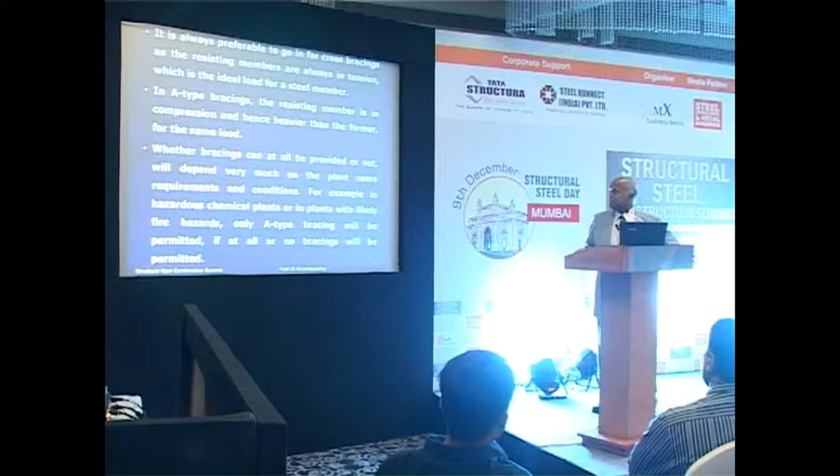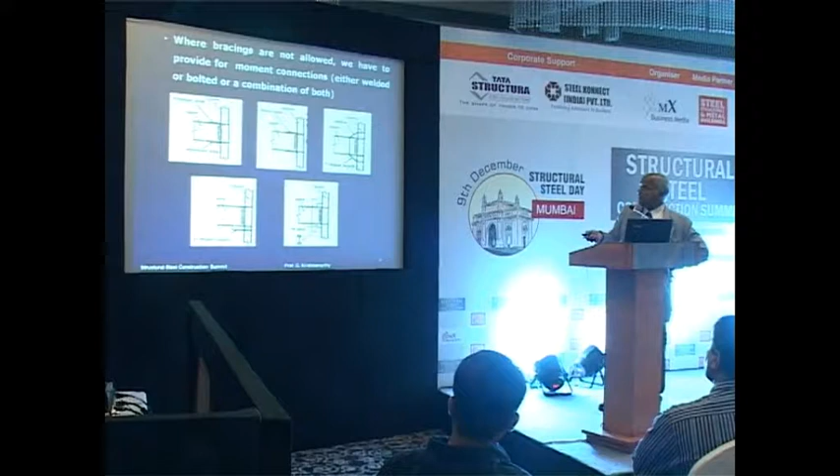So, as I told already earlier, you have to decide whether bracing is allowed or not, and if it's not allowed, then you have to go in for moment connections. So I have shown some typical moment connections here. Like see, here this is for taking the shear, while these connections are for resisting the moment. This is, I would say, a fully welded moment connection. This is also fully welded. All these are fully welded.

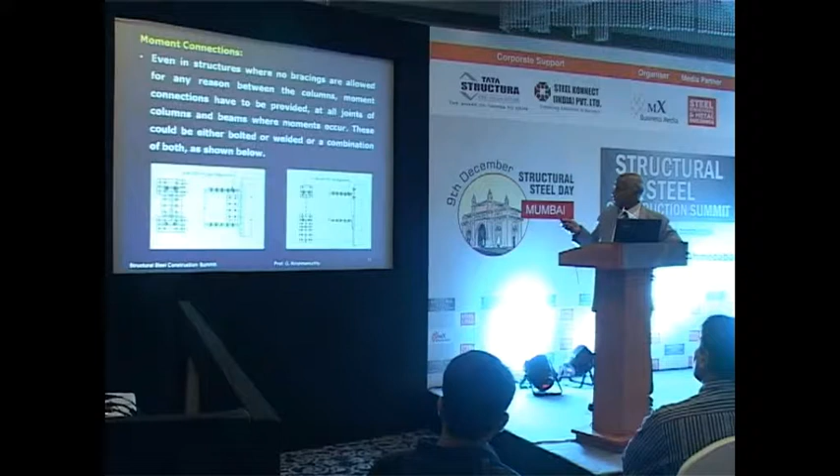Oh, I'm sorry. Oh, I don't know what's happened. Can I not go back? No.

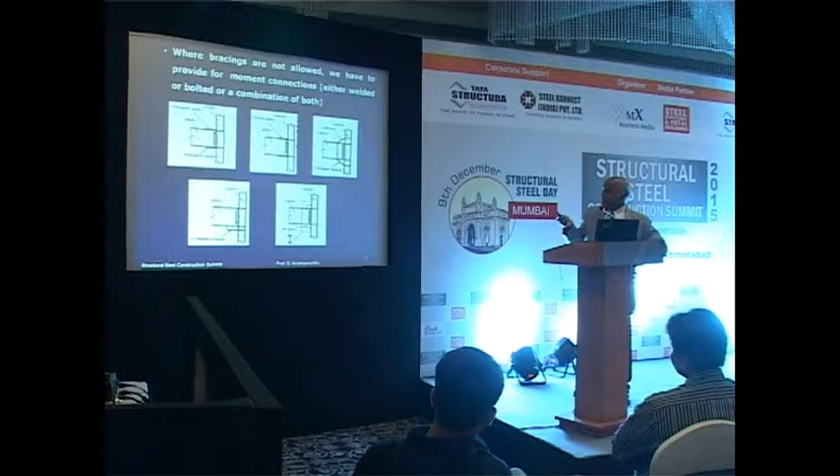Moment connections can be of so many types. I have shown just some of them; for example, in some cases you make it still stronger by putting this. It is optional, sometimes it is necessary, etc. But these are various types, so to say.

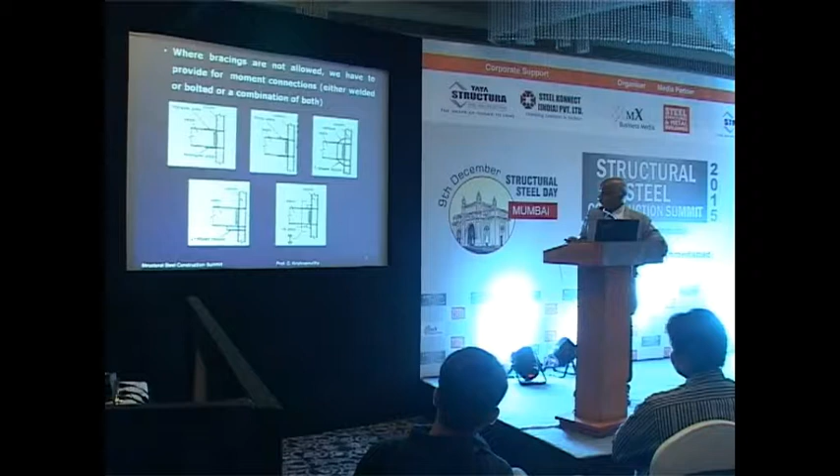Now, going back to a frame structure, basically we talk about beams and columns. So when you talk about moment connections, the beam is designed, the column is also designed. Because not only the connections at the joints, but also the columns as such have to resist moment. So I just mention a few words about what sort of sections we should use for columns.

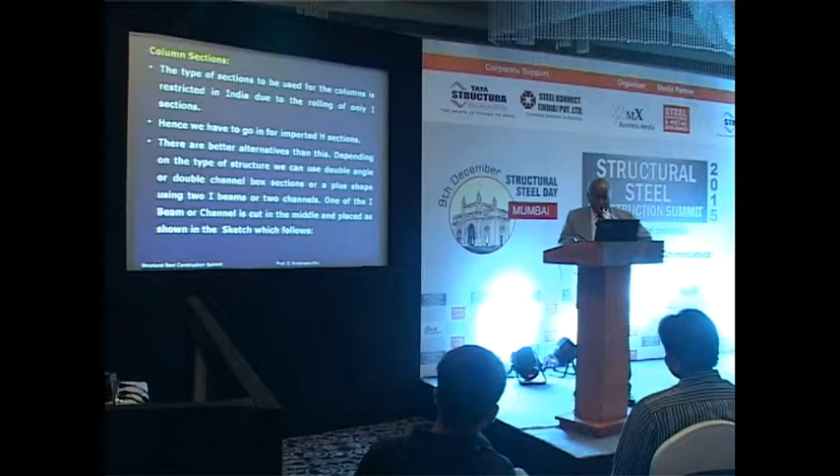Now, basically, to the best of my knowledge, in India we have IS tables for all types of sections, but what is being rolled by the rolling mills is only I sections, which is very uneconomical for columns. And we have to go in for H sections. I heard that some company is making H sections, but not the full requirement of the country, so we have to import those sections. Instead of that, there are various alternatives using the sections which are available in India. I will show you that.

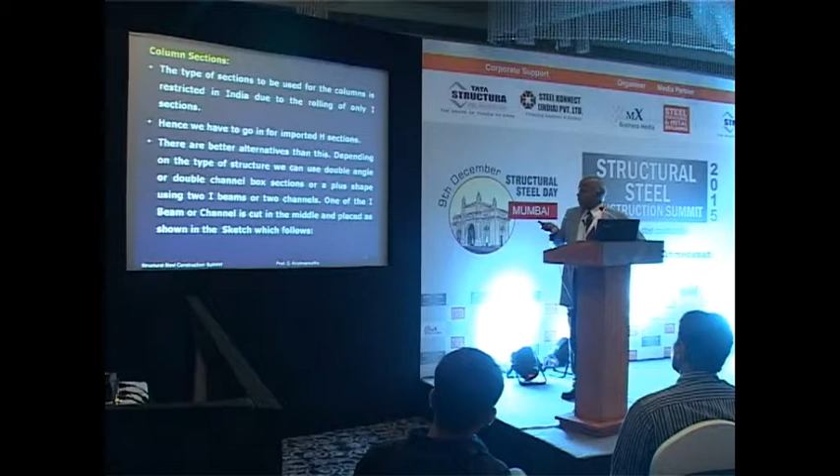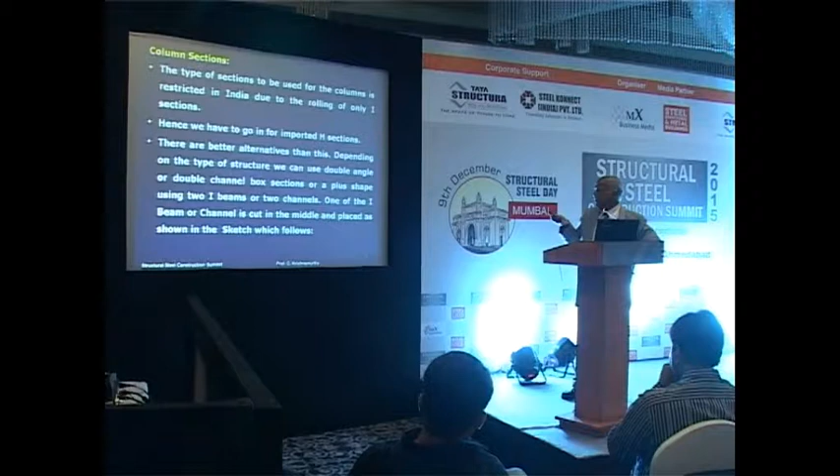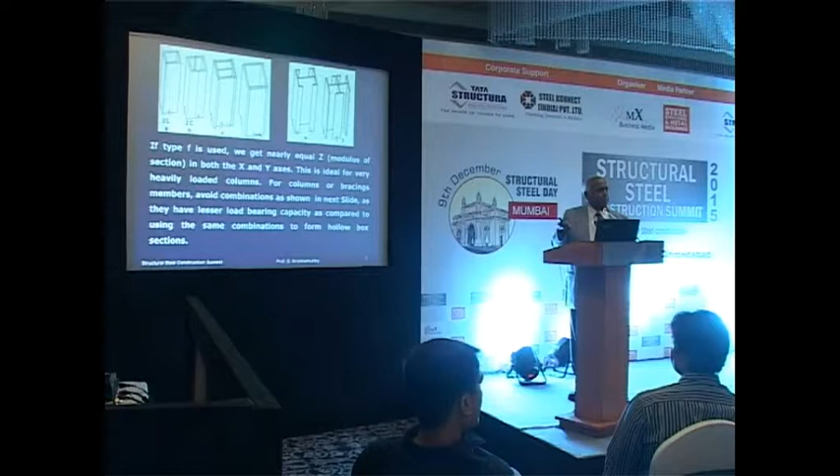I remember when I first used this, many of my colleagues were telling, how can you do this, it's not possible, this will bend, distort, etc. But nothing like that happened. Maybe I was the first person in the office at that time and I had no reference material also, but still I took the guts to use it, and it succeeded. In a project it was very useful because the steelwork weight was quite less for the capacity.

You see, it was a very highly loaded structure. Because as I said, in such plus sections, especially when we use two sections of the same property like ISMB 400 or ISMB 300, whatever is required, you get virtually the same moments of inertia about the X and Y axes. There is a slight difference because you are cutting it fully.

So these are the things which I would recommend. But there are other things which we have been used to using in structural steel, especially in earlier days when we were only using riveted and bolted structures. With the advent of welding, those types of sections, irrespective of whether you use them for earthquake or anything, I would recommend that we should not use. I will just show them.

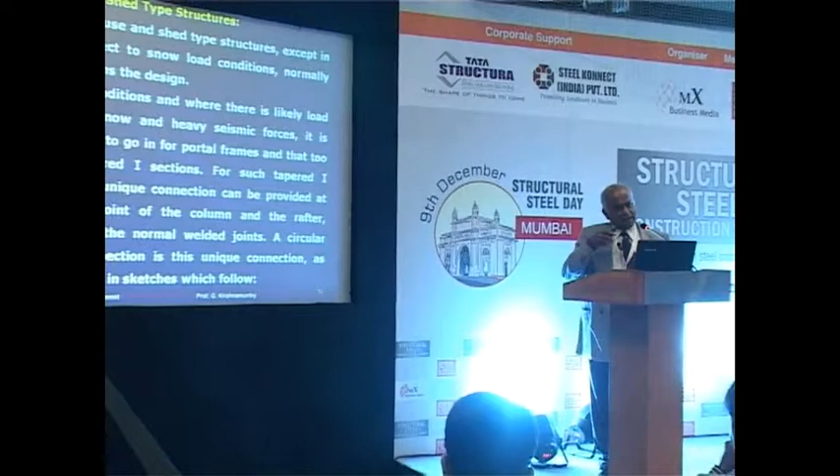Now then I go in for these type of structures, what type of structures we should use, and what about the moment connection there. We had to go in for a uniform section for the column and for the rafter, because we couldn't do a design with a varying section. Nowadays it is possible, and I remember some years back I was working for a company abroad which was using prefabricated structures. We had totally tapered sections for the column and multi-tapered, varying sections in the rafter also.

That's why, as I say, it is always economical and a better looking structure to use portal frames than trusses. And for such tapered I sections, a unique connection can be provided at the knee joint of the column and the rafter, which I will show next. Normally you go in for very bulky connections at portal frame knee joints. But I have seen and used, in a prefabricated company, a bolted connection at the knee.

After all, what is moment? As one of my seniors used to say in my earlier days, ultimately it's a couple. So the same moment can be converted into shear forces which will be shared by all the bolts, and that was a very convenient connection for site erection also. No welding was involved, and the rafter and the column used to be just assembled with a slight difference of half a web thickness, because it was off the center, and we used to do the work very fast at site.

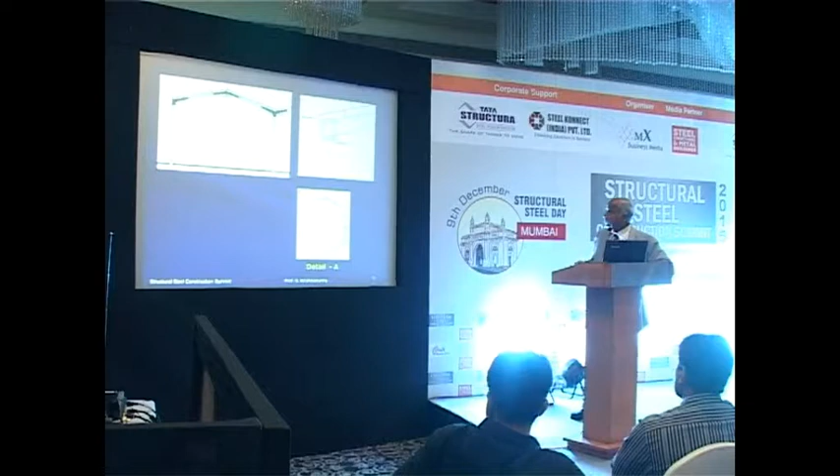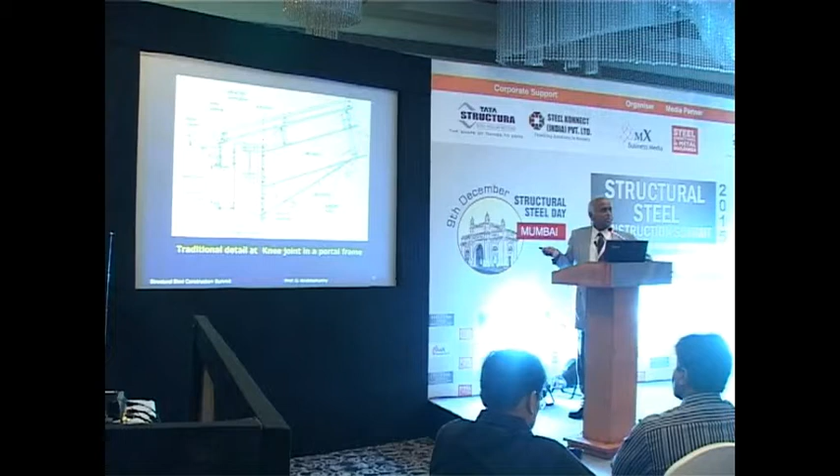These are, as I said, the standard connections for a portal frame. These have a very bulky look, and I always feel they look very dirty. And it involves a lot of site work. These are other typical connections, totally welded, partly bolted, then welding at site. This is a typical one without tapering section, this with tapering section. But these are all very cumbersome work at site. You are not sure of the quality.

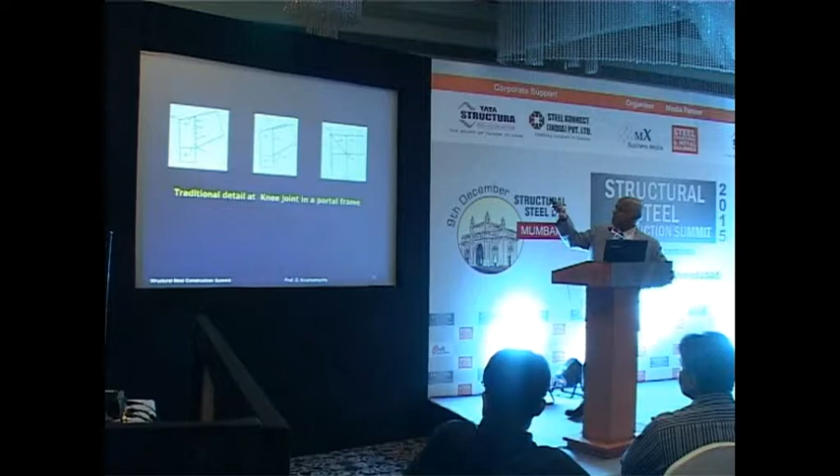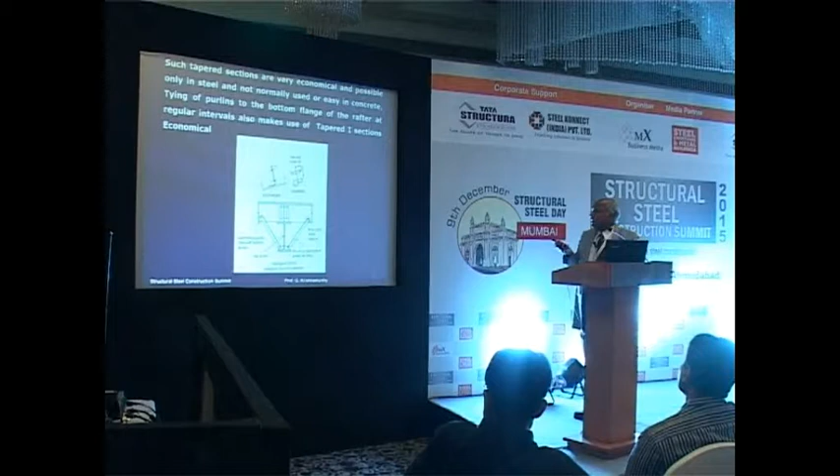Then similarly for such portal frames, again, because normally I don't find such things being used, and people criticize these light purlins in these prefabricated structures. Some of my friends who have come here who are working for prefabricated structures could throw more light on that, because many engineers say that this should satisfy IS 800, but prefabricated buildings don't conform to IS 800. They are all designed to some other standard, which in India I don't think we have still developed, but abroad in USA, UK and Europe they have standards for that, and maybe they have some limitations, but it is very light and very cheap.

I remember we used to do prefabricated structures, portal frames for standard buildings without any special load, within 10 kilograms per square meter. If we did more, then my estimating department would say that we won't get the job. To that extent, and people in India, my friends would never believe that we were able to do structures for 10 kilograms per square meter.

So here, to make it very economical, normally when you analyze the portal frame, when there is reversal of stress, the bottom flange gets overstressed at some places, and that is only in certain loading conditions. Now just for that, we have to go in for a higher section for the I-beam, for a higher bottom flange. While if you connect the purlin to the bottom flange by such a simple connection at certain intervals depending upon the unsupported length required for the bottom flange, then the bottom flange of the portal frame was very small and much more economical, and the extra money spent on putting such restraints from the purlin was making the purlin span also slightly less, and also providing very good restraint to the bottom flange.

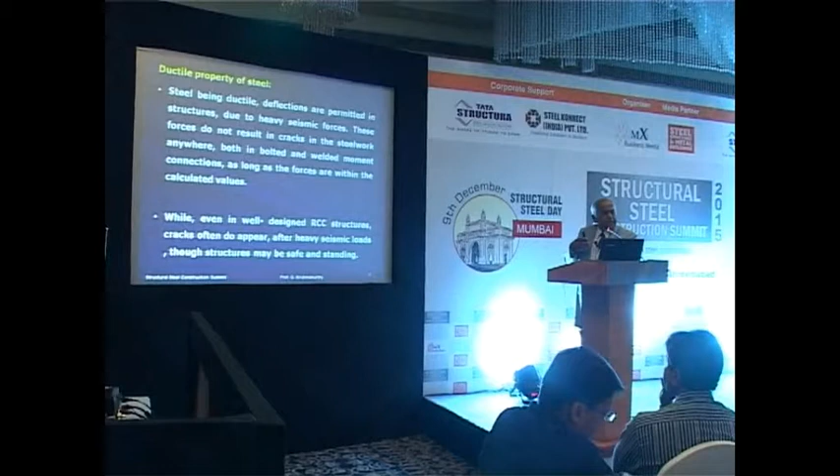In the 1980s and 1990s, some steel structures in Japan and then in Mexico, etc. Till that time it was believed that no steel structure will fail in earthquake. But those were the structures in those countries which failed, and failed very badly in earthquake. And then they found the reason for that. So we won't go very deep into it, but just for information, that is why they are now going in for certain types of connections which resist such loads also.

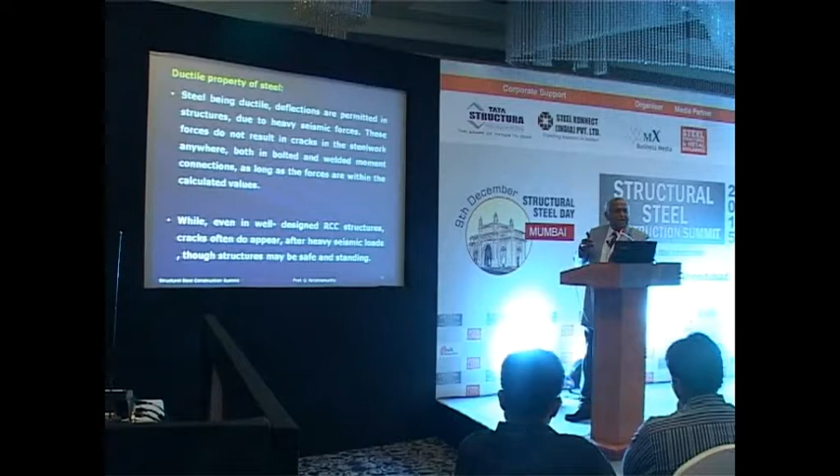While in RCC, I am not saying all RC structures, but quite often, because I went around the structures in Ahmedabad after the earthquake, you will invariably find some cracks at certain places. The building would not have collapsed or even got damaged, but definitely it would have cracked. While in steel, I didn't have any opportunity to see any steel structure because there was no case of any steel structure which was damaged by the earthquake. That's why they said this does not mean that steel structures will never fail. They do happen, and I already talked about that.

And now again, ductility is another property which is a disadvantage, as they say, for bolted joints, because steel being ductile, the connections will stretch, the connection might get loose, etc. And we don't use lock nuts in all connections, we use lock nuts only in anchor bolts. So sometimes the connections get loose, but if you are sure of the forces and they are very high forces, you can go in for high strength friction grip bolts or high tensile bolts, and for some very important connections you can even go in for lock nuts, so that you can reduce the inconvenience due to that property of steel. That's all.